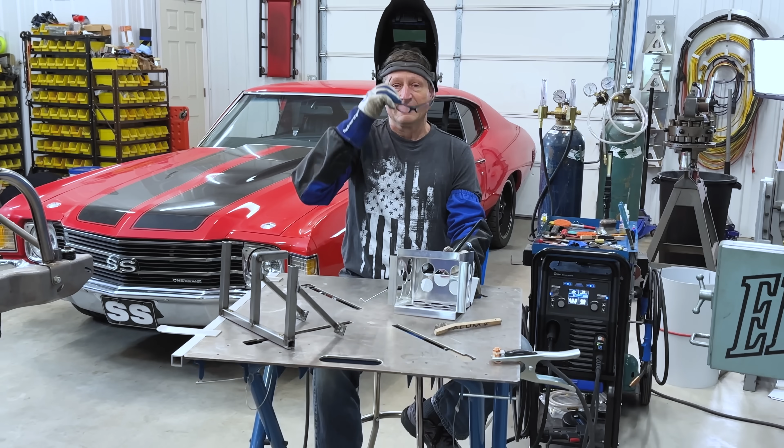Today, I'm putting the old girl on a diet. I'm gonna show you how to drop 25 pounds in a single day and still eat anything you want.

Normally, I use the Optima red top battery in my performance cars, but I've decided to go a different route with the Trans Am project. I want something smaller and lighter, so I've been doing a bunch of battery testing using my red-headed girlfriend here.

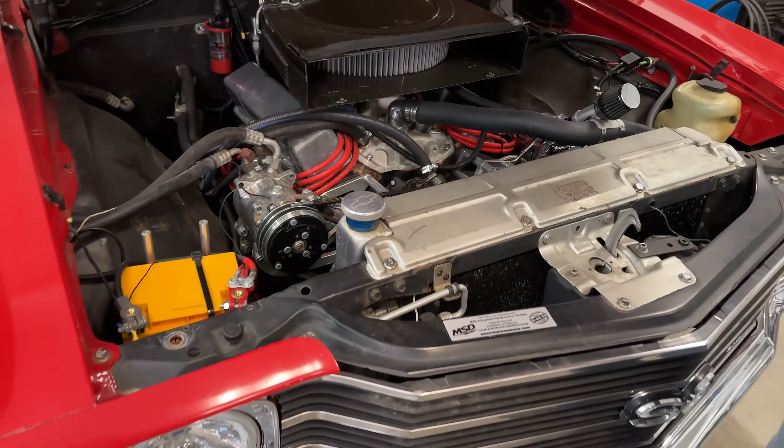I've settled on a motorcycle-sized lithium battery with an incredible 700 cold cranking amps. It has no problem starting the 358 cubic inch 10.8:1 compression small block. That might be too much to ask for on an 800 plus horsepower 427 LS. So I plan on running a dual battery setup in the Trans Am.

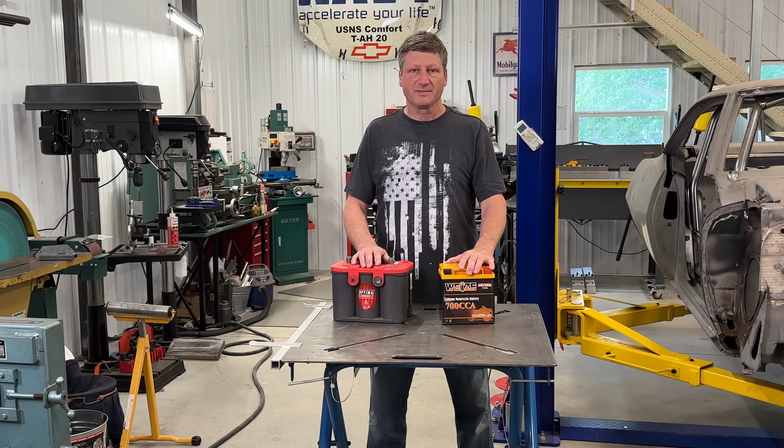So here's where the diet plan comes in. The Optima battery has 800 cold cranking amps and weighs about 40 pounds. The lithium battery has 700 cold cranking amps and weighs about 7. Running two of them puts me at 14 pounds.

I'm not going to get into all the testing specifics, but I can say that I did exercise Amazon's return policy quite a bit. Some of the things I like about this battery is that it has a pretty good battery management system, allowing for charge voltages of 13.5 volts to 15.5 volts and up to 30 amps.

The downside to lithium batteries is usually its temperature range. -4 degrees to 140 degrees Fahrenheit on the discharge cycle and only up to 115 degrees during charge cycles. That kind of screws up my plan of putting the batteries in the area that I cut out during Season 3, Episode 6. I used the driver's side area for a custom dry sump oil tank.

And even though I haven't had any issues with the under hood placement during the Chevelle testing, I'm not confident that those temperatures are going to be low enough in the Trans Am, especially during track days. So plan B is to mount the batteries underneath the passenger side dash in a slide-in mount.

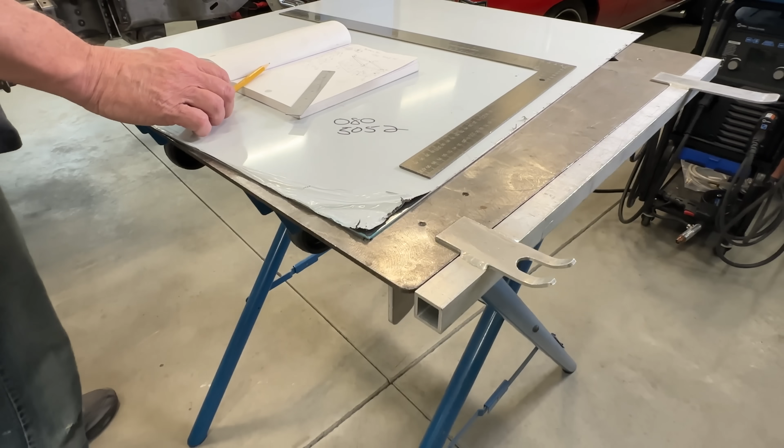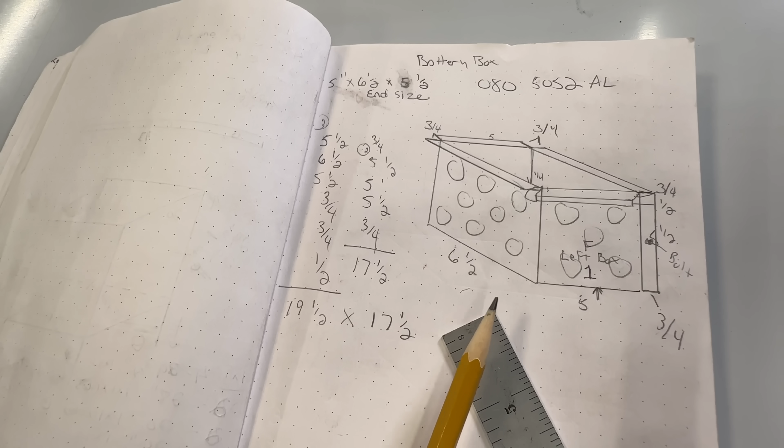Now, it's make some lightweight battery trays. For this project, I'm using .080 thick 5052 aluminum. I like to draw out my designs on projects like this. It makes it a lot easier to figure out my total dimensions, which will be 19.5 by 17.5.

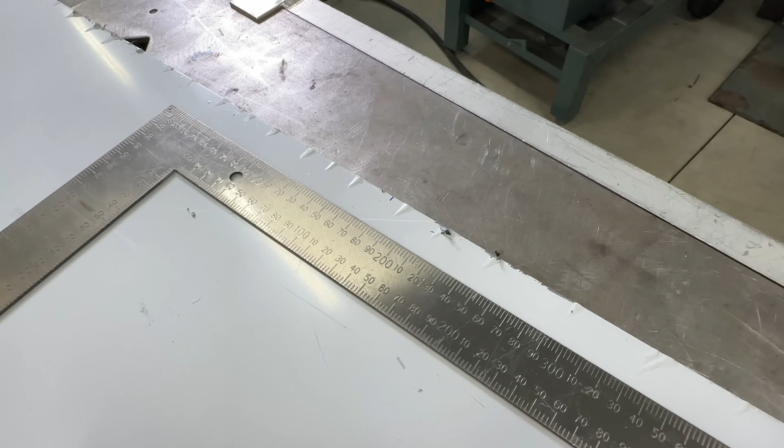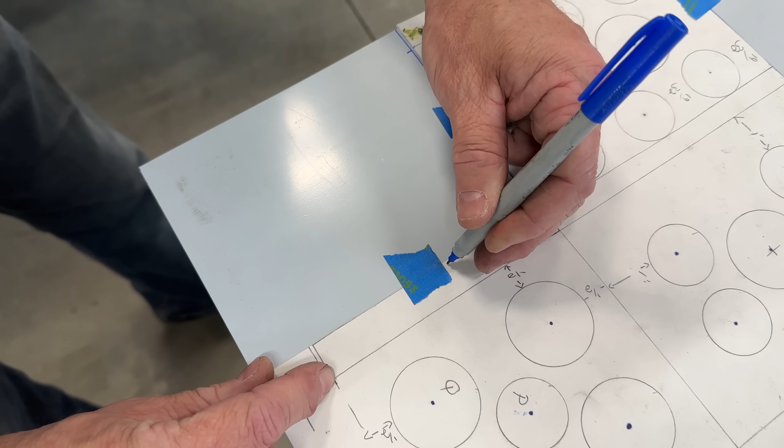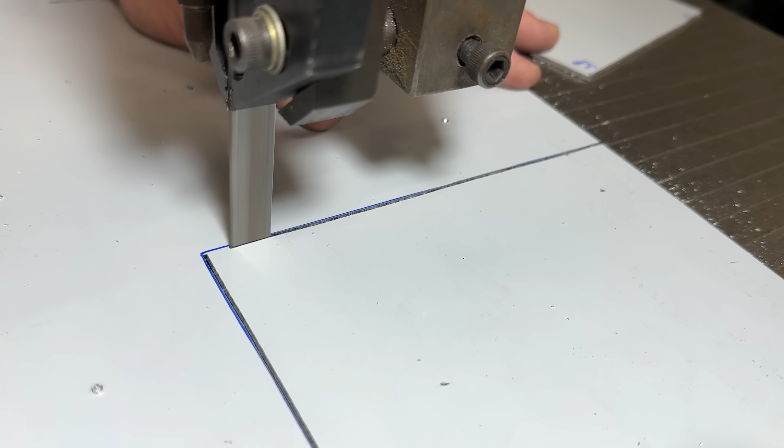Using the template I made from my drawing, now it's mark my cut and bend lines on the aluminum. Next, it's center punch where my lightening ventilation holes need to be. These are 1 3/8 and 1 3/4 holes. A little bandsaw time to cut off my corner drop-off pieces. And don't forget to deburr the cut edges.

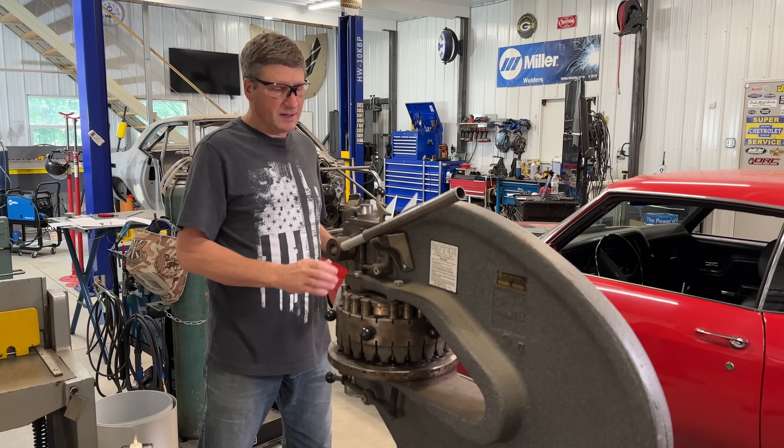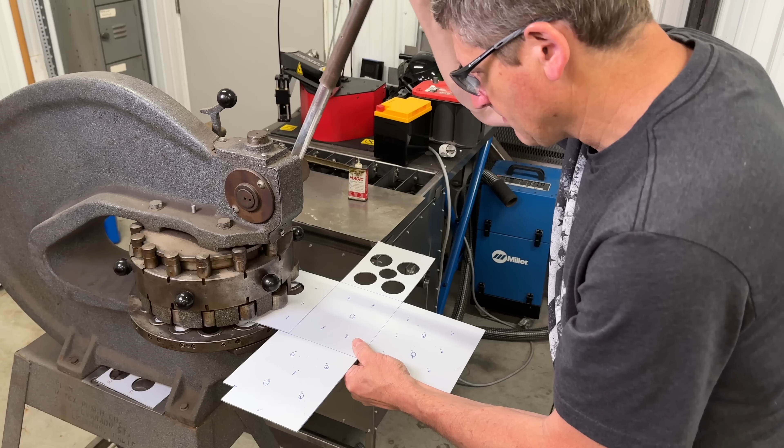I'm using the Rotex punch to make my holes. You could use a hole saw for this, but the punch is going to be a lot quicker and cleaner. Obviously, with my design, I plan on bending my sides and my top lips. If you don't have access to a box pan brake, you can easily just cut the sides separately. It only ends up being 4 more welds.

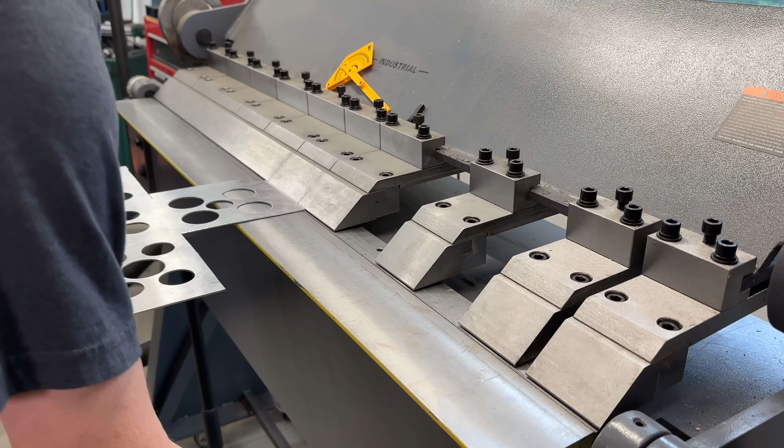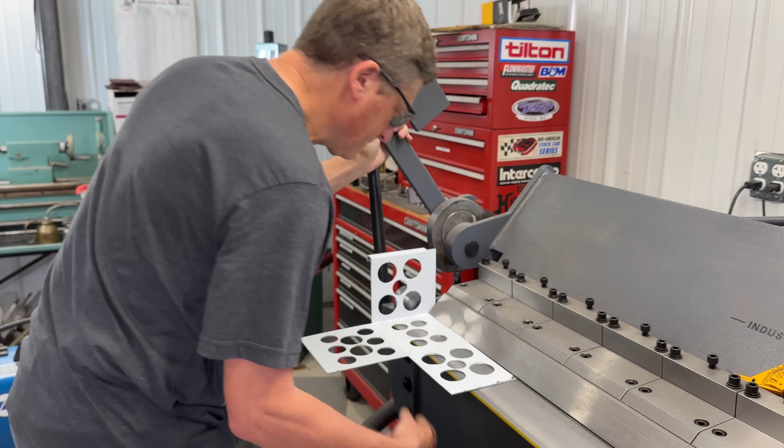I'm starting with a double 90-degree bend on the end that will serve as the handle. Then the deep side bend and repeat. Small 3/4 inch 90-degree bend, flip it, and deep 90-degree bend. The reason this works is because there's about a 1-inch drop behind the base of the die, allowing clearance for the 3/4 inch lip.

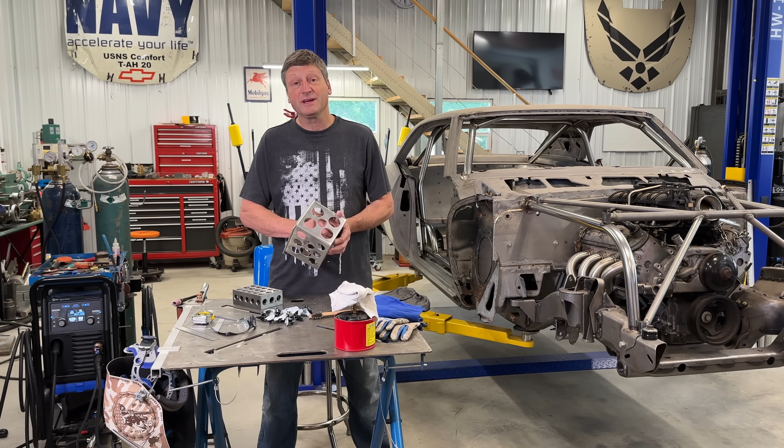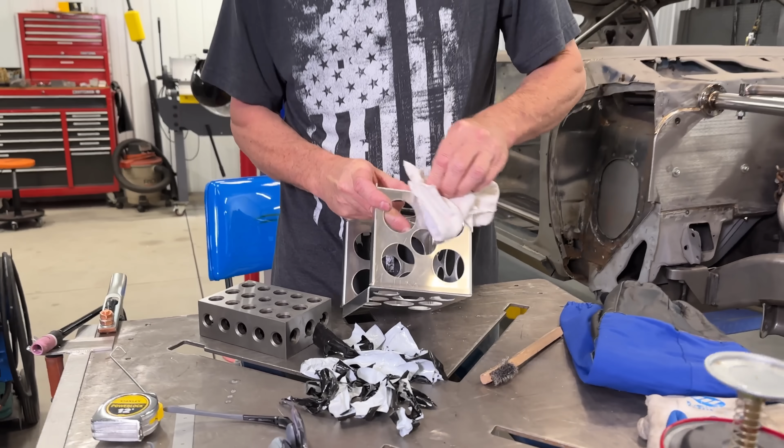This may sound stupid, but don't forget to remove the protective plastic film from the aluminum before welding, and clean and prep your weld joints. Warning: read and follow all labels and your owner's manuals. For welding, I'm using 1/16 5356 filler metal.

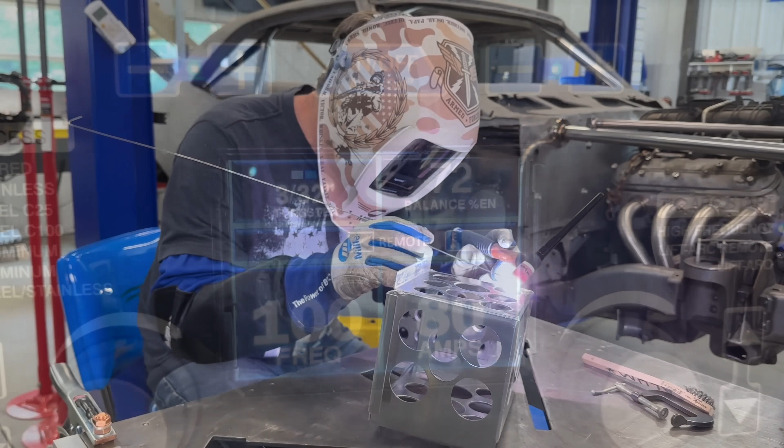I've got my Multimatic 220 AC/DC set for 80 amps and 100 on the frequency, which is lower than the factory setting of 120, giving me a little wider arc. Since I'm welding outside corners, I set the balance to 72, because the lower balance will help clean the oxide layer off the sides that are falling away from the tungsten.

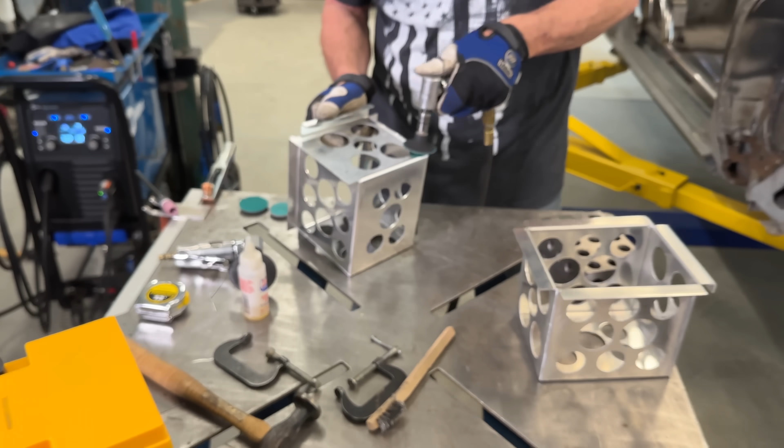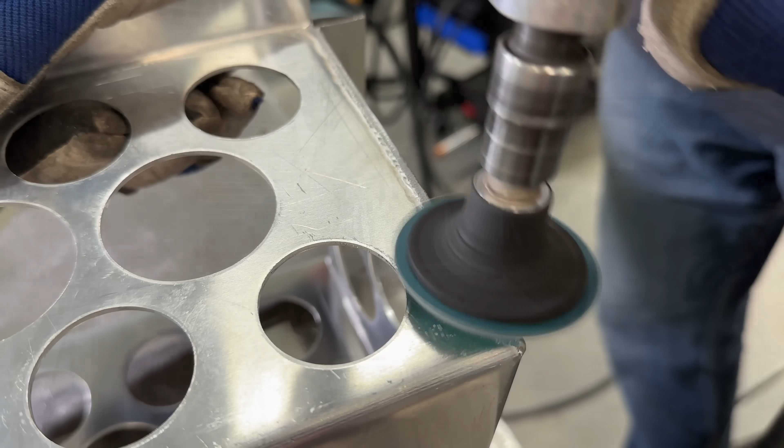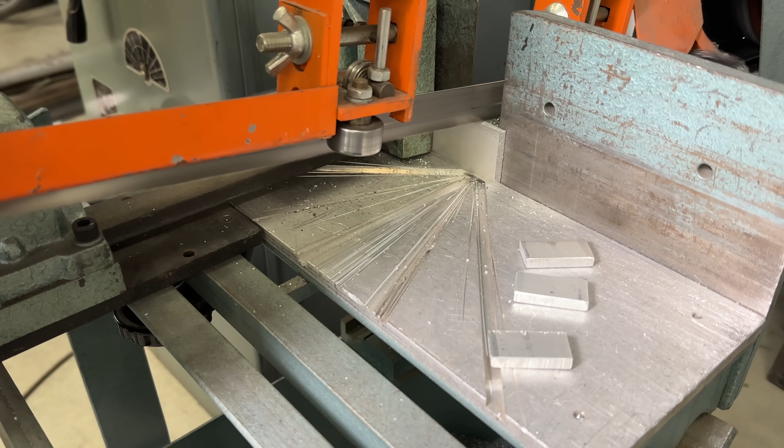I'm metal finishing my weld beads because I made my slide-in mount fit tight to the box measurements. Let's see if they fit. Looks good to me. Now I gotta make some battery securing straps out of the same .080 5052 aluminum and some 1/4" 6061. I'm cutting 4 pieces of the 1/4" 6061 to 3/4 inches by 1.5 inches long. Then drilling the center with a number 7 bit for a 1/4-20 tap.

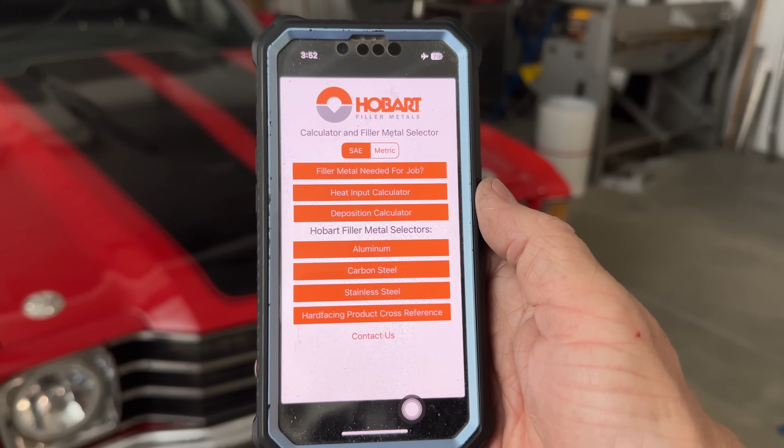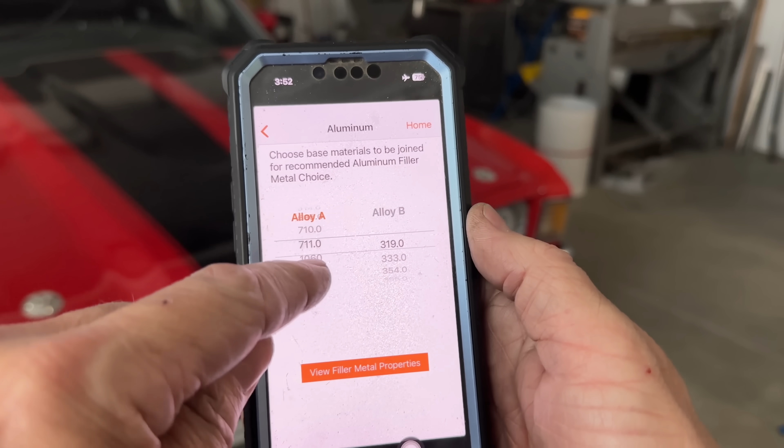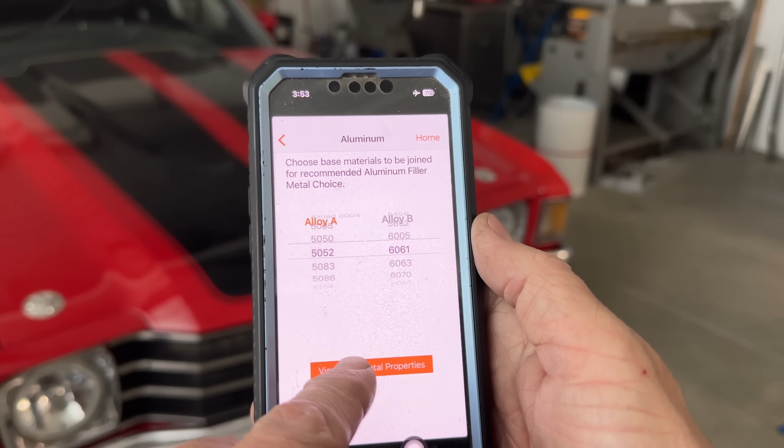For welding the 6061 to 5052, I'm checking the Hobart Weld app to pick the best filler for these 2 different alloys. It's just as simple as picking the 2 alloys from the different drop-down menus. So on alloy A, we're going to pick 5052. And alloy B, we're going to pick 6061. And then hit View Filler Metal. So here's the filler metals they recommend by applications.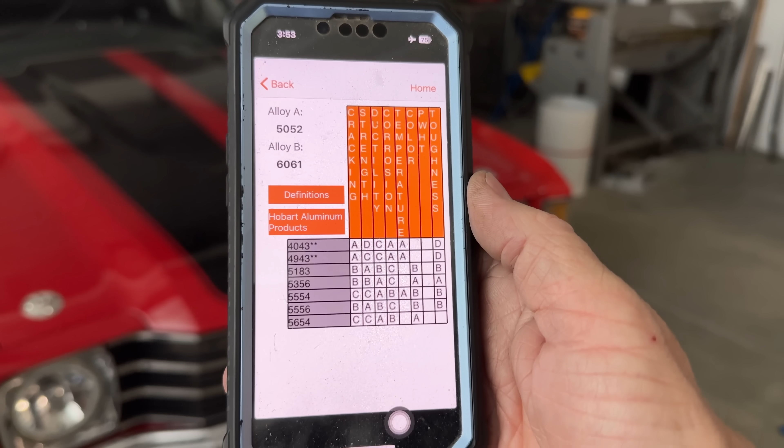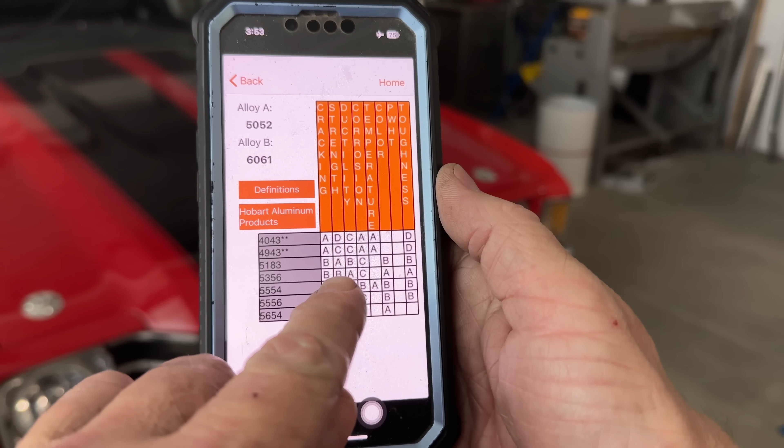So if this was an under the hood application, I would think temperature might be my first concern. But since we are mounting the batteries inside the firewall, I'm going for higher strength, ductility, and toughness. So that looks like 5356 is going to score high. In strength I got a B, ductility A, and toughness A.

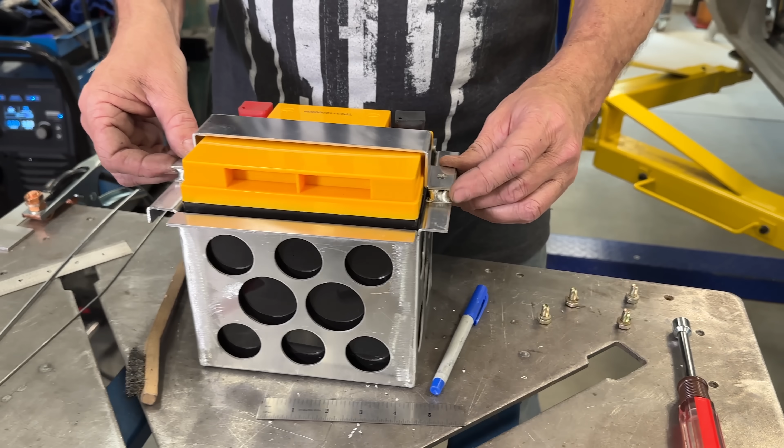I'm setting the Multimatic 220 AC/DC to 185 amps, bumping my balance back up to 75 and frequency to 120. I'm just welding the outside 2 ends. For my top strap, I just bent it to conform to the top of the battery, and then drilled 2 9/32 holes for my 1/4 inch bolts.

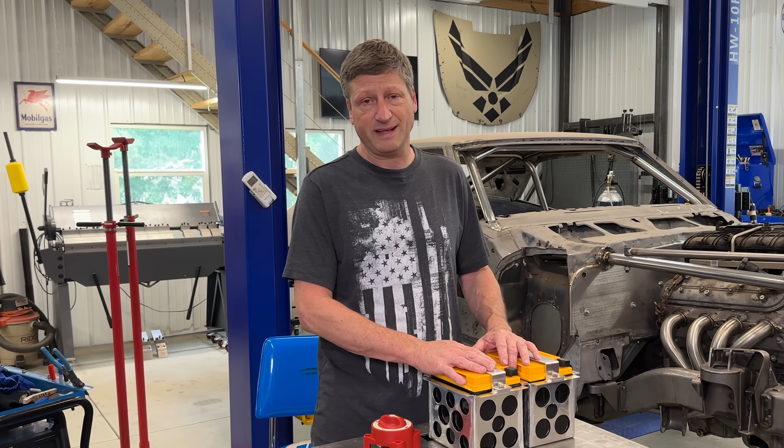For starter type lithium batteries, they don't have as much reserve capacity as a standard battery does, which is why I'm installing this battery selector isolator switch, so I can disconnect one or both batteries from the system. That hasn't been an issue with the Chevelle testing, because there really isn't anything drawing on the battery when not in use, like say an alarm system or any other accessory that might stay semi-powered up.

In that test, during over a week of non-use, the battery still measured 13.4 volts, which is over a 90% state of charge. And for the Trans Am, having the ability to disconnect a battery ensures that I have enough reserve starting capacity during longer dormant cycles. The last thing I need to do is drill a hole to secure the battery trays to the mount. Both trays will be mounted with 1 bolt.